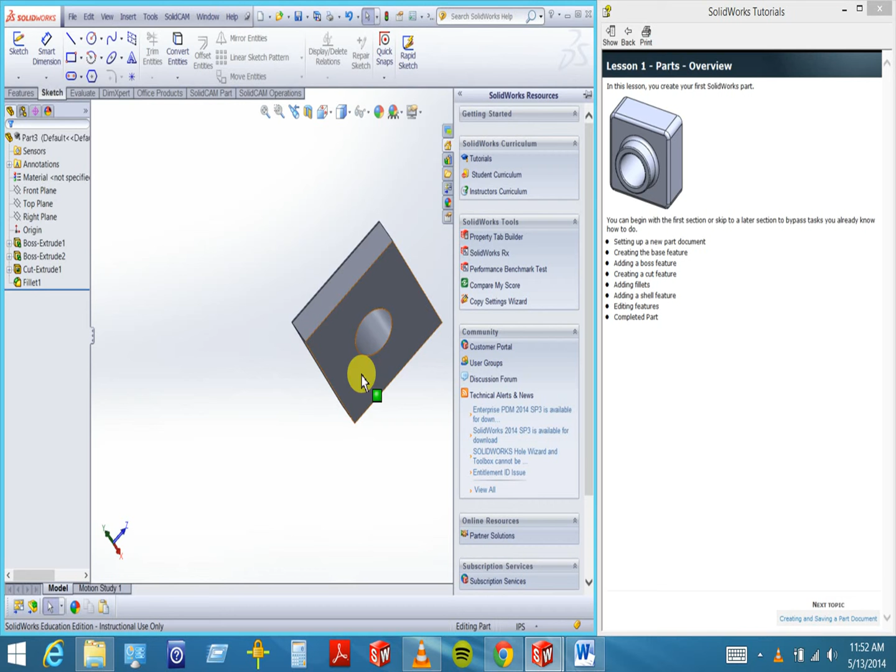Okay, I want to show you something kind of cool. So you should be in inch units, which I know you guys don't like.

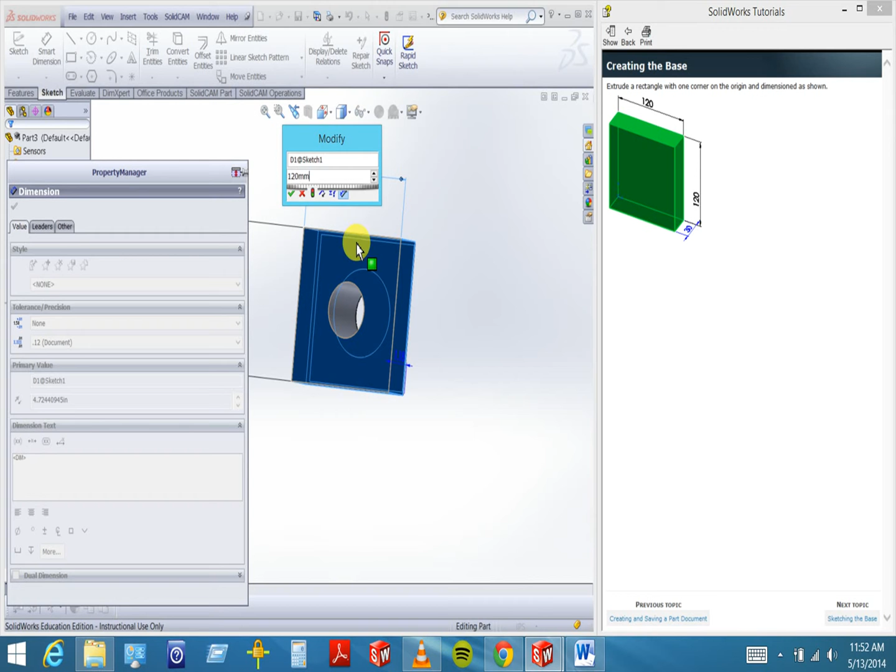But when I went and dimensioned my part, the tutorial wanted 120 millimeters. I'm in inches, but when I went to do my part, I typed in 120 and hit millimeters, and it made it 120 millimeters, but it displays it as its English equivalent, 4.72 inches.

So this is a cool little way for you guys to stick with the units you'd like to design in, but display in the units that you might manufacture in. So I thought that was kind of cool with SolidWorks.

You can also hard type it. If you typed 120, you can use this little drop down unit thing and pick all kinds of units. I thought that was nifty.

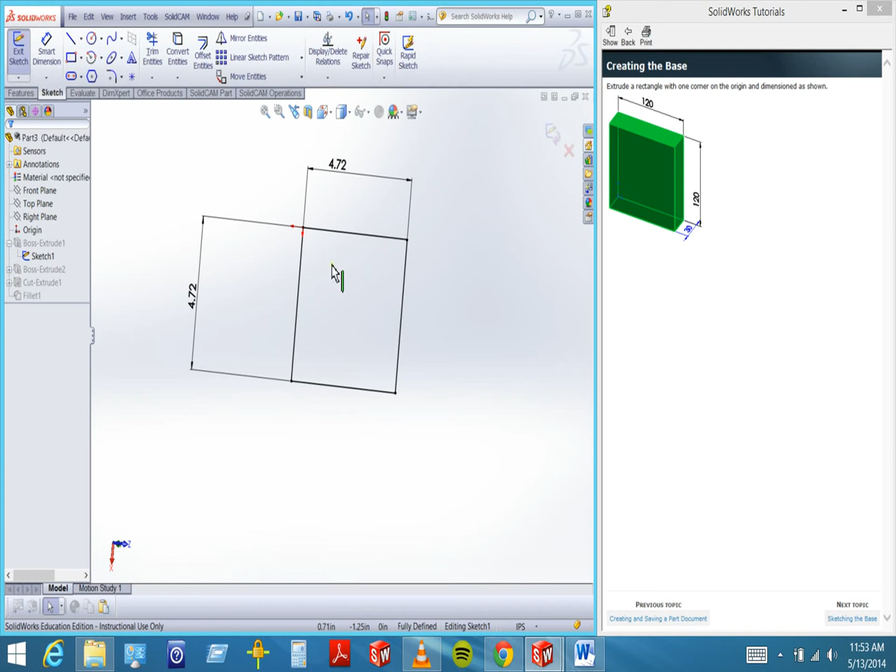Okay. The other cool thing I wanted to show you, in order to do it, I'm going to delete my hole. I'm going to delete all of them. Let's see here.

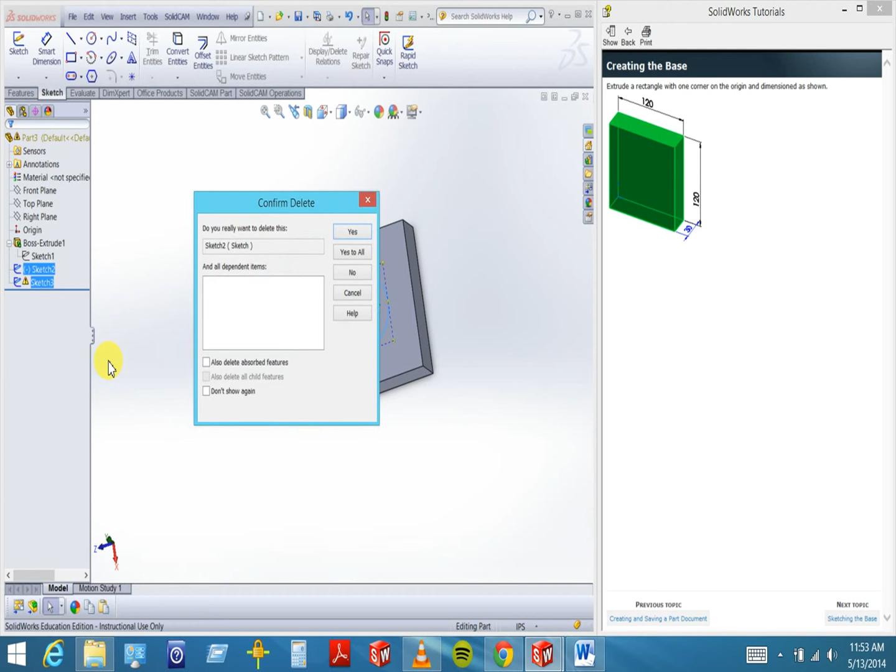Okay, so you were going to make this boss on here. So a couple of cool techniques. I think I showed you this before, but you could either open a sketch right here and sketch on there, or you could say, hey, I'm going to make an extruded boss base, and it asks where you want to make it. So you can just click this face.

Notice the little stoplight thing. This is not rebuilt yet. It's not done because you really haven't sketched anything yet.

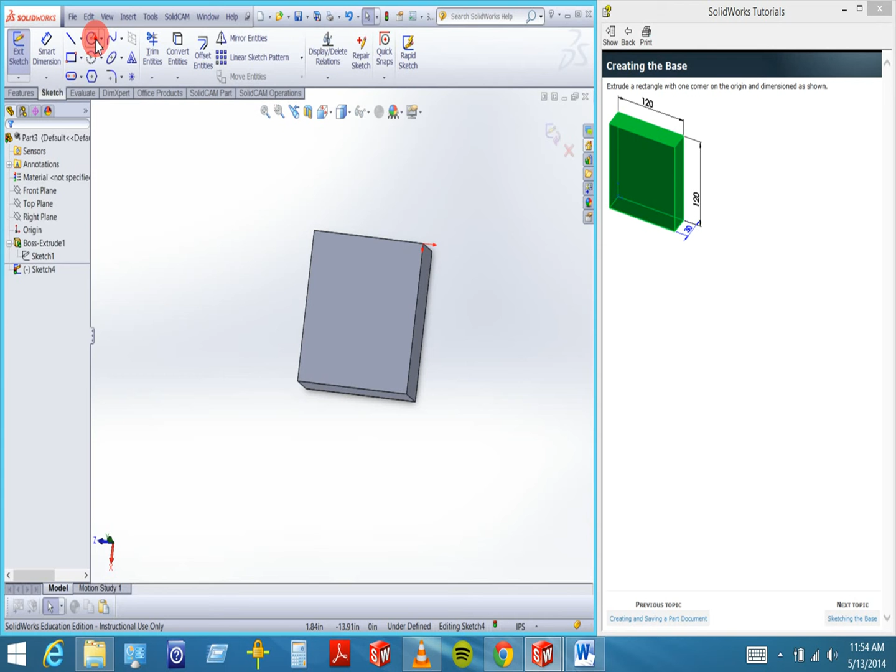All right, I'm going to pick a circle. Now, you could just draw this anywhere and then dimension it where it's supposed to be, like the tutorial tells you to do. So it tells you right here, dimension the center 60-60.

We talked about relations in adaptive parts. They don't care in this tutorial. But there's another way to do it.

You could center this on there non-adaptively without doing the dimensions. You can skip it. The way you can do it is you hover over this line and run down until you hit the midpoint, and then watch as you pull down. You can see this little dotted line. Okay, and then I'm pulling down. Well, I don't see a dotted line in the middle of the other one.

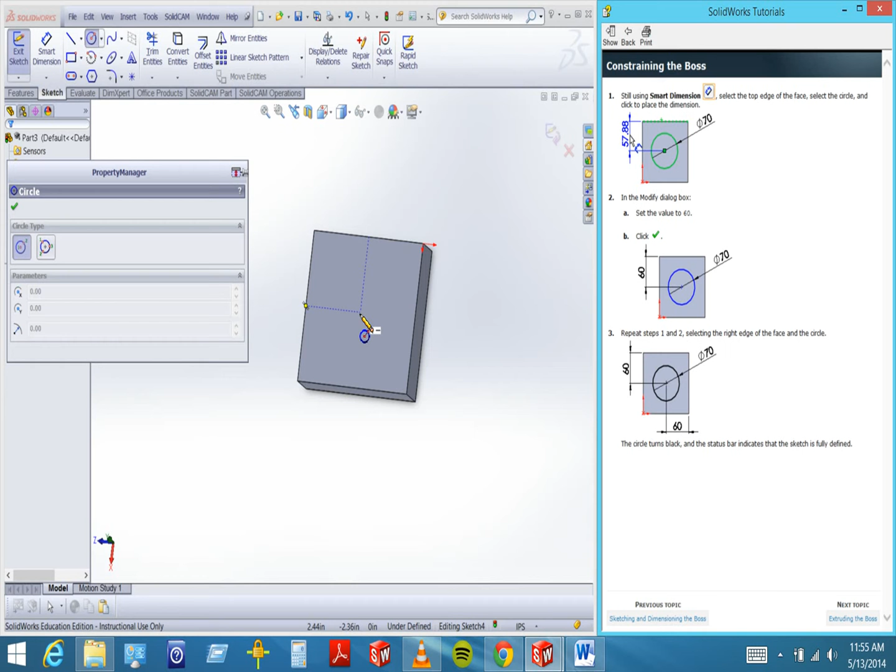All right, so why don't I go to this line and cruise over to its midpoint and start pulling to the right, and I see a dotted line horizontally. I keep going, and up I intersected that other line. So as we were hovering and dragging, we were teaching SolidWorks, hey, we're interested in the midpoint of this line. We're also interested in the midpoint of this line. And then SolidWorks thinks, well, if you're interested in those two midpoints, how about the intersection?

Once you've hovered over, then you can click and pull your circle, and it's centered.

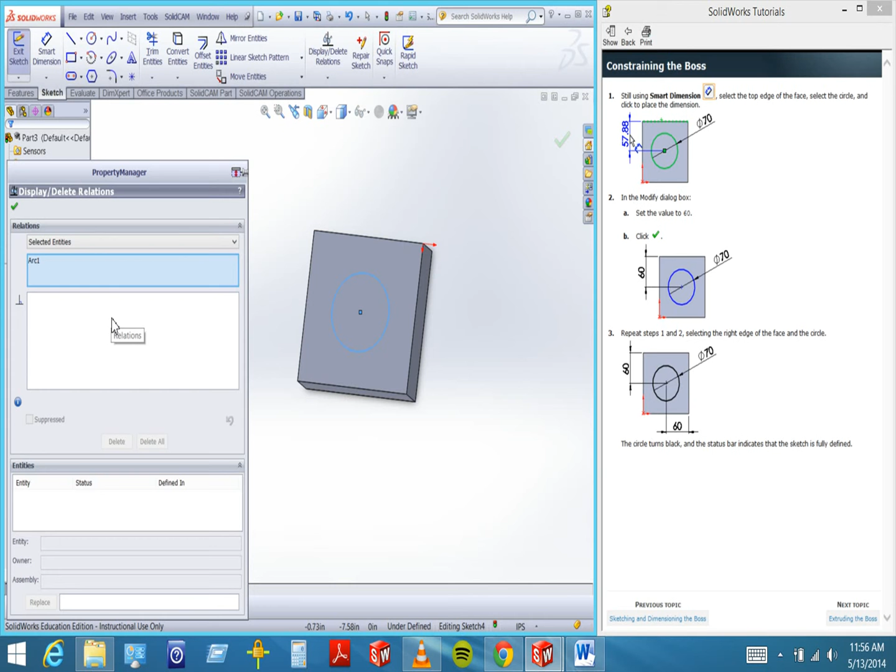Now, one neat thing about that is, let's go ahead and look at the display delete relations. Check it out. It knew we wanted the circle in the center, but it didn't give me those goofy relations, which I may or may not have wanted.

So I thought that was kind of a cool little thing. So always, if you're interested in something, always hover over it as you're selecting, and SolidWorks may figure out what you want for you. So don't be afraid to hover over things.

I can't remember how thick they wanted this thing. 25.

So here I'm going to try it again. I'm going to make the extruded cut in here. Instead of drawing the circle somewhere and then forcing the center to be concentric, which I could do with a relation, I could draw the center and click the two centers and say be concentric, or click the two circles and say be concentric. I could force that relation.

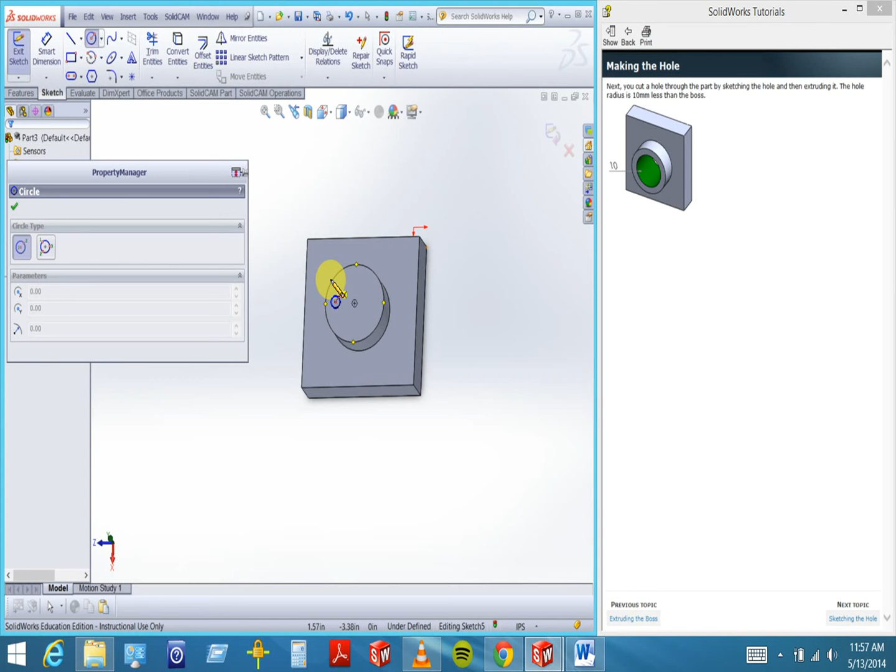Another way to do it is I could just hover over the circle and tell SOLIDWORKS, hey, I'm interested in this circle. And it says, hey, there's 4 points on this circle in a quadrant and there's a center. Were you interested in any of that? And then I can go click the center and pull my circle and it makes it concentric. I thought that was kind of cool too.

Okay, another thing I want to show you before we finish is fillets. This tutorial would kind of tell you about this, but it breezes through it. So let's say I wanted to do a fillet. I could select this edge and see it gives me a preview of that fillet. It's a 0.1 inch radius right there.

I could also select this edge and this edge, and I can do multiple fillets all in one feature. I click OK, and it fillets those, and it puts them all in this one fillet, okay? Instead of doing like 10 of them, you can put it all in one feature.

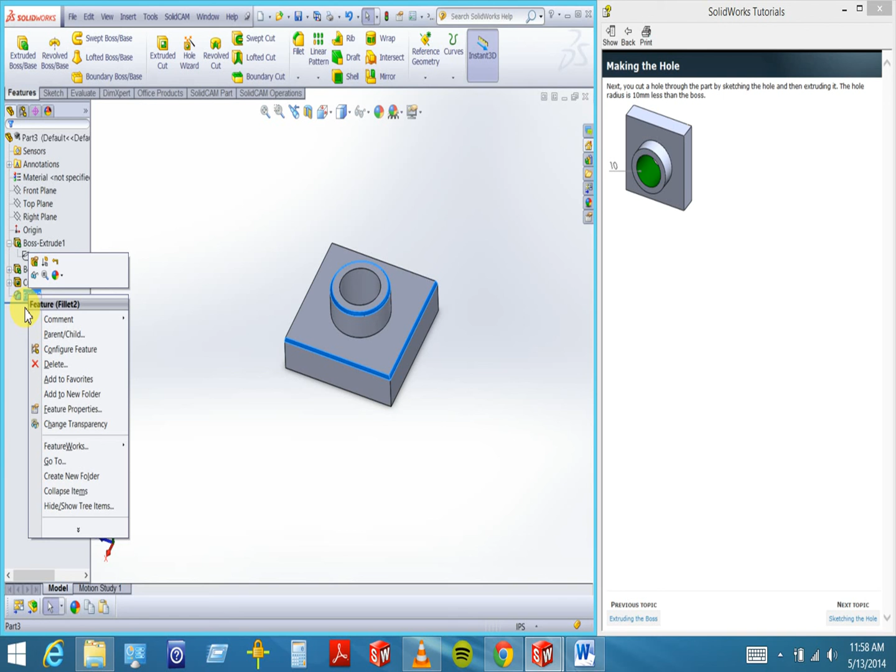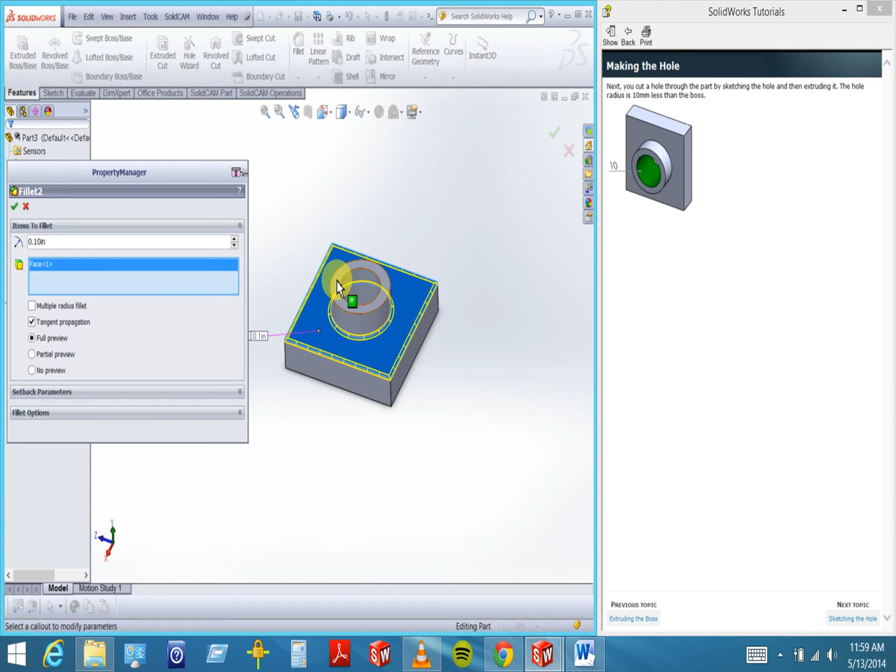Another thing you can do is, I'm going to go back and edit the feature. Go in this window, I can right-click Clear Selections. You can do other things like select this face. So if I select this face, it selects all the edges on that face, including the one that's with the boss, the circular boss, and it fillets those. And then I can also select this top face, and it'll select those two edges. So just realize that there's some nifty options you can do with those fillets.

All right, we're about out of time. Last thing I want to remind you of is on that Lego, make sure you use a shell feature somewhere. I don't care what you shell, just use the shell feature. Any questions about homework, what's expected of tonight, tomorrow, any of that stuff?

Yes? For the thing we have to turn in tomorrow, like declaring our final project? No, that's Friday. Oh, that's Friday? Yeah. Oh, okay. You're going to upload the Word document by the end of first break Friday morning to D2L. Okay, and that's homework 2. So you'll upload it in the homework 2 folder. Homework 3 is due tomorrow. Oh, that's your Lego drawing, or Lego part.

So how detailed do we need to get in that description? As detailed as you wish. I mean, don't be so little detail that it's silly. I need to know. Do you want pictures, or is it just a description? You could do pictures if you want, but I was thinking just a paragraph describing the parts you were going to have, the drawings you would have of those parts, what the assembly would look like, maybe what the animation looks like. I don't know if I told this to the whole class, but like examples. Did I tell you the examples? So one example I thought of was I have this pool table I never used downstairs.